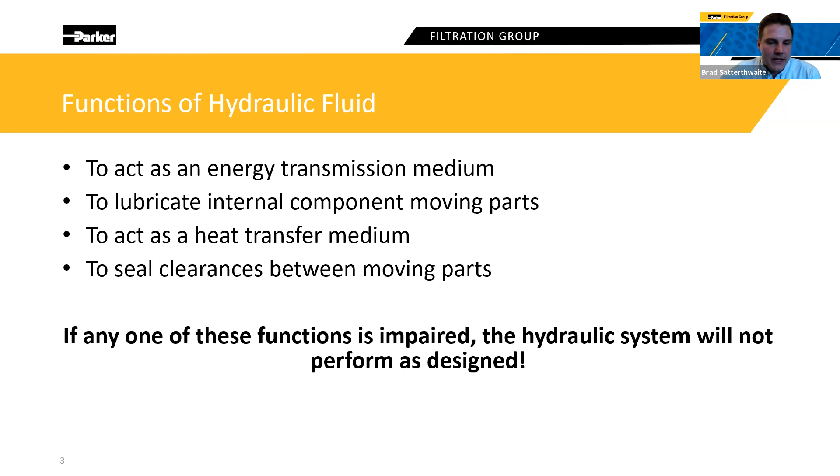If any one of these four functions is impaired, the hydraulic system will not perform as designed. From a leaking system to a system that does not have the output it was designed for, hydraulic contamination is the main way these problems start. It is the main cause of these impaired functions, and can be attributed to over 75% of the hydraulic and lubrication system failures we see in the field.

So that contamination will get into your system. It'll break down those four attributes of hydraulic fluid and can cause some headaches in the field.

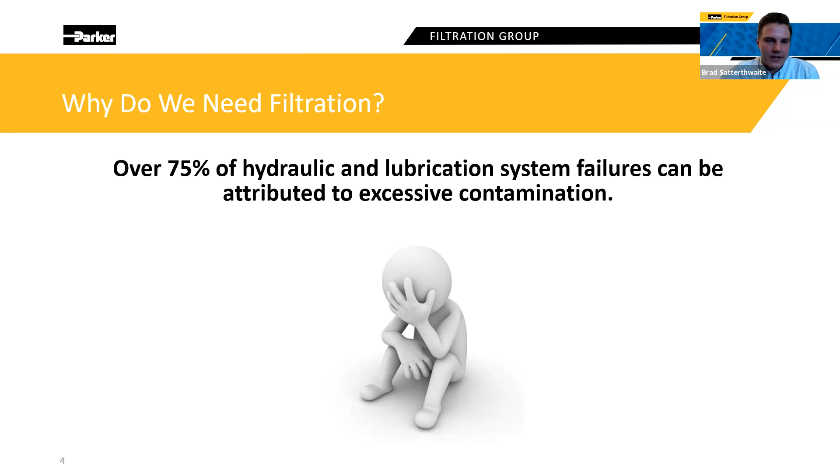When we talk about contamination, there are three main types found in a hydraulic system. The first one is probably the most common, the one everyone's most familiar with—particulate, just hard particles within the system. But there's also water and air contamination that can get into your system and interrupt the functions of that hydraulic fluid.

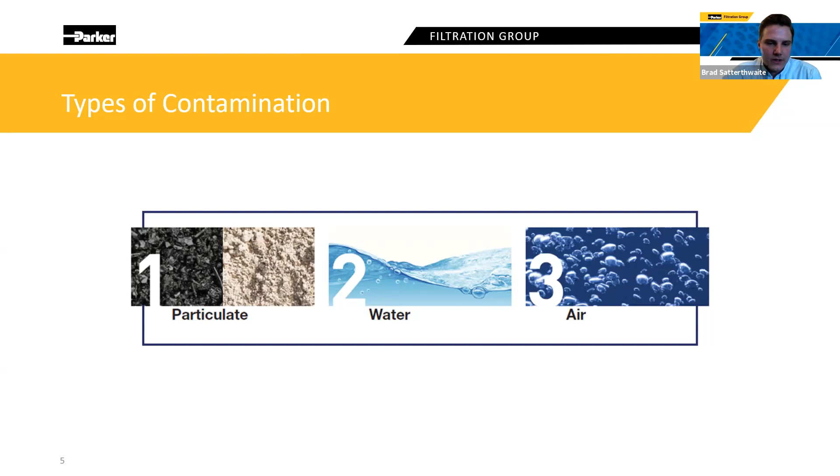To dive into particulate contamination, there are two different types: silt and chips. Silt is the small particles within the system, typically less than 5 microns in size. You need to care about those as they build up within the system over time. Those small particles won't cause big failures all at once, but if you let them build up and conglomerate together, they can cause issues.

The chips are particles greater than 5 microns in size. As soon as they enter your system, they have the potential to cause immediate catastrophic damage. They can get between clearances of different components and cause breakdown right away, so they're really the ones we need to filter out and keep out of our systems.

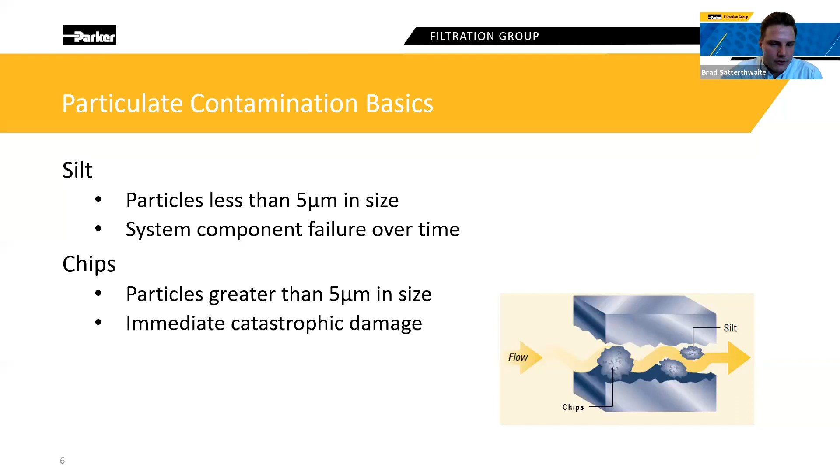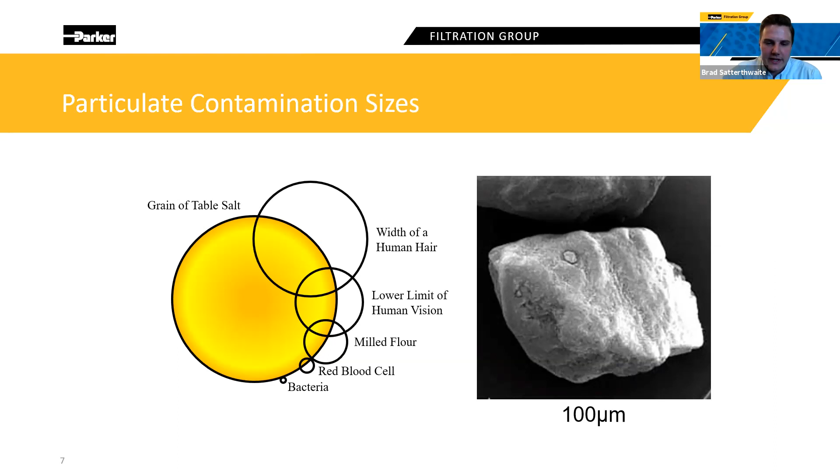When I said 5 microns in size, that's not really a unit of measurement most people are familiar with—it doesn't show up in daily life. So I wanted to give some real life comparisons for how small that actually is. A grain of table salt is about 100 microns across, so that's about 20 times bigger than the particles we care about.

The lower limit of human vision is about 40 microns, so anything smaller than that is not visible to the human eye—you'll have no clue it's in there. If you hold up a sample of oil, it'll look perfectly clear and clean, but there could be a ton of stuff smaller than 40 microns and greater than that 5 micron threshold that we care about.

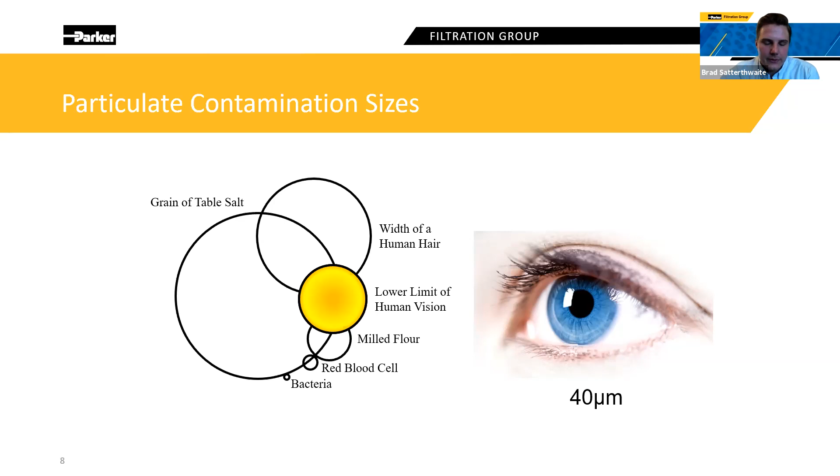When you get down to the size of bacteria and red blood cells, that's really the area we care about within a hydraulic system. That 5 microns is right in between those—it's not going to be visible to anyone, even the best vision among us. So that's really what you need to look out for. It won't be easy to diagnose when you take a sample, but it will still be present in the system.

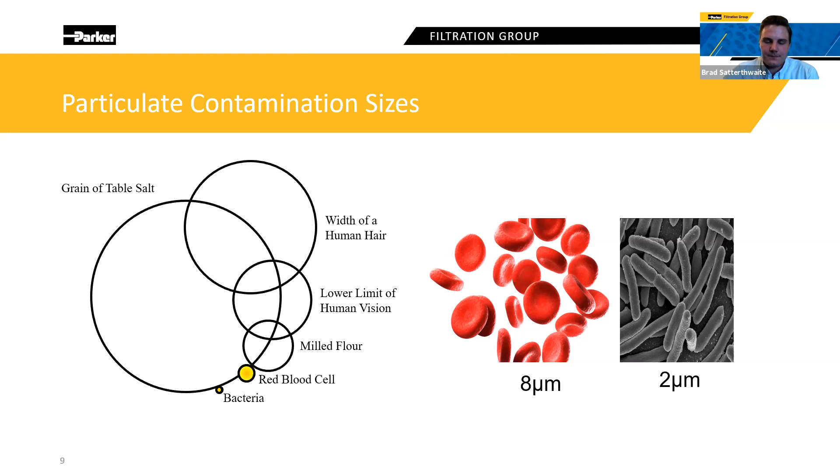When we talk about contamination, we first need to understand where it comes from. There are a couple main different types and sources of contamination. The first one being built-in contamination.

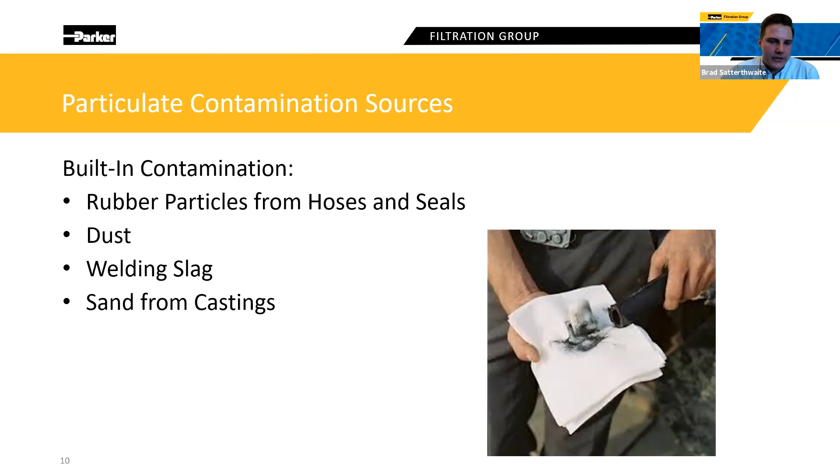Whenever you're building a hydraulic system, you'll be cutting hoses, and there'll be seals going in that can generate rubber particulate if left in the system. If the system was built and then sat around the shop before being put in service, it can gather dust or welding slag if that's present in the environment. Different parts can have sand from castings in them, depending on how they were manufactured—that's another place contamination can just be built into the system. It may not have done anything wrong; it is what it is, present when you build it, and it's part of the building process of a hydraulic system.

There's also externally generated contamination. Depending on the environment, there can be a wide range of ingression rates for your hydraulic system.

You may think the assembly facility you're in is perfectly clean. How could any particulate be in the air? But again, it's the really, really small particles that you can't see. You don't even know they're there, but they're going into that system at a high rate. If you're in a dirty environment, like mobile equipment or construction equipment, you could even be pulling in up to 10 billion particles per minute. So this really puts into perspective that you may think nothing is entering the system, but you can have some extreme rates of particulate being pulled in.

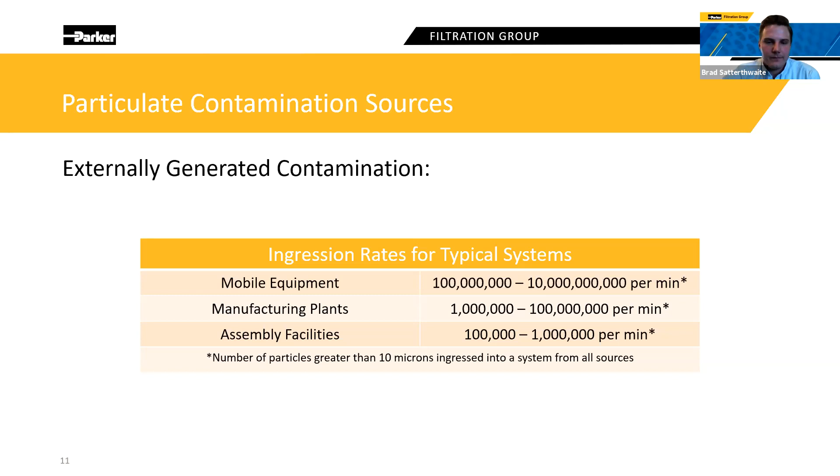Moving to generated contamination. Even if you're not pulling much in, doing everything right, you can still be generating contamination within your system. The main ones to look out for here: abrasive wear is when a hard particle bridges two moving surfaces, scraping away material on one or both sides, which generates more particulate. And in turn, that particulate can generate more and more particulate. It builds on itself as it goes.

Another source of generated contamination is erosive wear. Silt or fine particles, if in a high speed stream of fluid under high pressure, can run through your system and break down edges or surfaces within it. The best way to picture this is if you have a bend in your system, all those particles are flying through the fluid, and as soon as they hit that bend, they slam into the end of the pipe. When it does that, it breaks away little pieces every single time. Over time, it continues to build on itself and gets worse and worse until you have chip particulate that can cause major problems in a system.

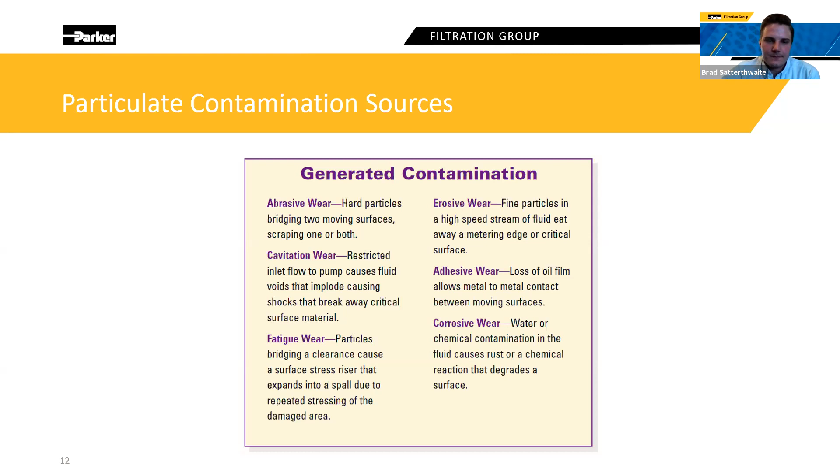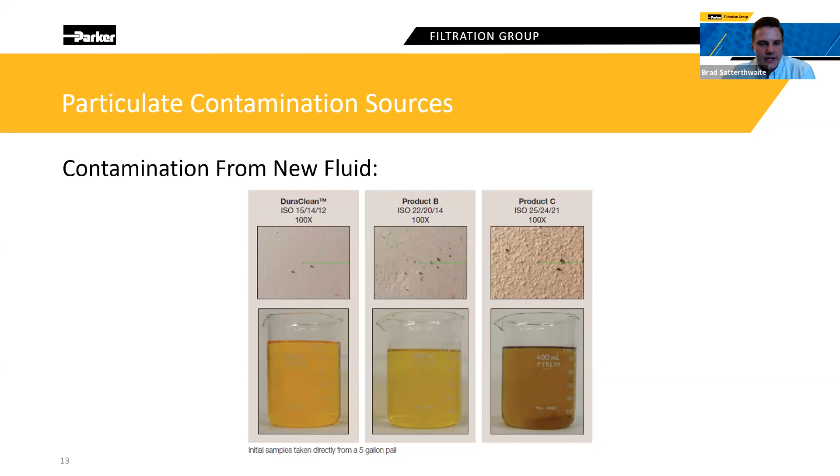Most manufacturers add different dyes and coloring to their oil to get it to look a certain way out of the pail. As you can tell, this really dirty one is the dirtiest oil, but you'd guess the next one would be second dirtiest, though it's actually a lot cleaner than some others. So just visually inspecting oil, both because of small particulate invisible to the human eye and by color, is not a good way to diagnose what's wrong with the system.

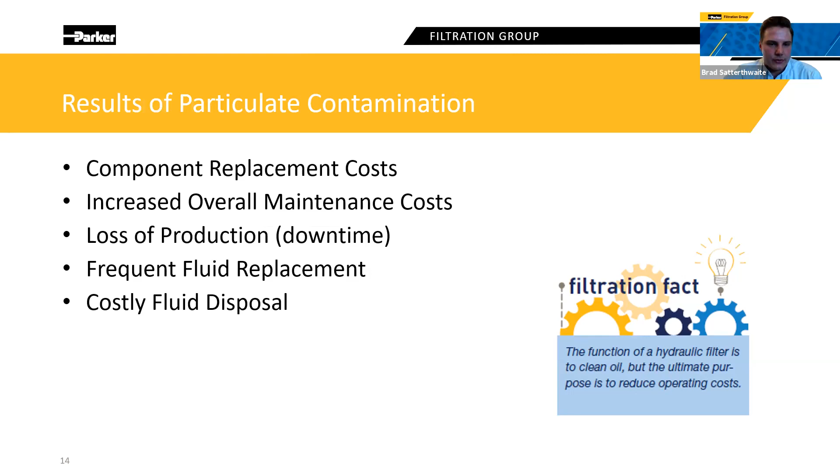Going into what actually happens when you have particulate contamination: it builds up over time, you get bigger and bigger particles in the system, and you can increase component replacement costs. That particulate can break down different components, causing increased maintenance to replace those parts and increased costs to buy new ones. All that together can increase loss of production or downtime for your system.

That obviously costs money as well. You're not able to produce or use that equipment while it's getting fixed. It really causes a bunch of headaches just because of these little tiny particles in the system that you can't even see.

On top of that, there's frequent fluid replacement, which can be very expensive, just to drain out all the oil and replace it with new clean fluid. But then you also have to dispose of the old fluid, and that can be 3 to 4 times as costly as buying the new fluid is.

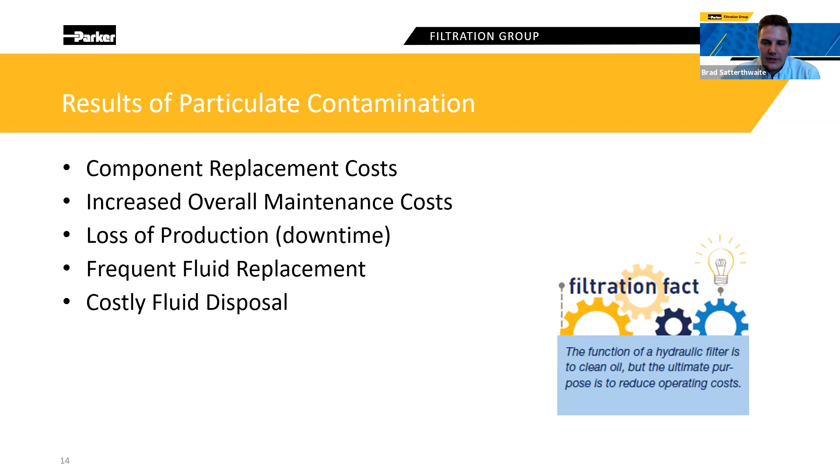The function of a hydraulic filter is to clean the oil, but really you need filters to reduce operating costs—reducing downtime, reducing maintenance to keep your system running. That's what a filter is used for. It does clean the oil, but really what you care about is keeping the system up and running at a healthy rate.

To prevent particulate contamination, there are a few things you can do. The first is utilizing reservoir air breathers. Instead of pulling dirty air straight into the system, you can use an air breather to filter out that air and capture as much particulate as possible before it enters your system.

You can flush systems before initial startup so that built-in contamination can be minimized. You can flush it all out, hopefully getting it as clean as possible before you actually start up and get up to pressure.

You can specify rod wipers and replace worn actuator seals. Those are essentially just seals to keep the outside environment out of the system, rather than pulling in any dirt that may have generated or accumulated on exposed pieces of the system.

You can also cap off hoses and manifolds. Anytime you take a hose off the system and have an opening exposed to the environment, capping it off as soon as possible can decrease the amount of particulate that enters the system.

And like I said, you can pre-filter all new fluids. You don't want to get a new gallon of oil and just dump it straight in—you're introducing a whole bunch of dirt when you buy that new oil.

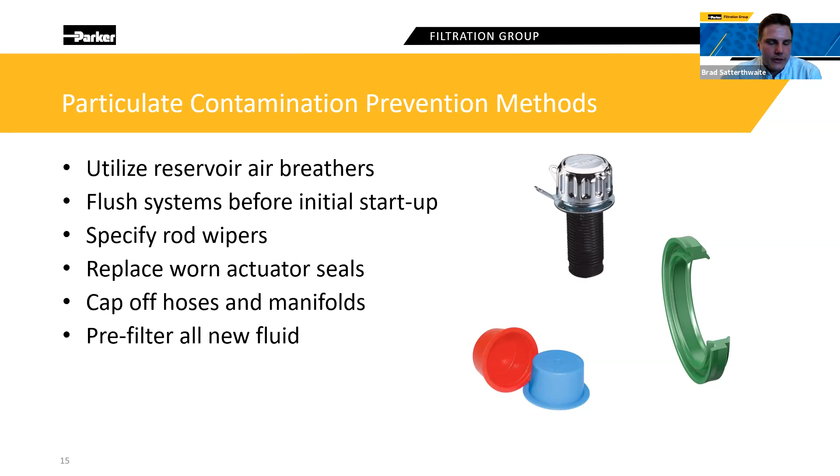Some warning signals: how do you actually know that particulate contamination might be a problem? How do you know this is something you need to worry about?

A couple of the main common warning signs are valve spool decentering—you may have leakage or chattering in that valve spool. You may also have pump failure, lose some flow, or just be replacing the pump more frequently than you should, since over time particulate eats away at the pump, causing it to fail prematurely.

You can also have increased servo hysteresis. These are just some main warning signals to look out for—if your system has any or all of these, particulate contamination is a great place to start looking.

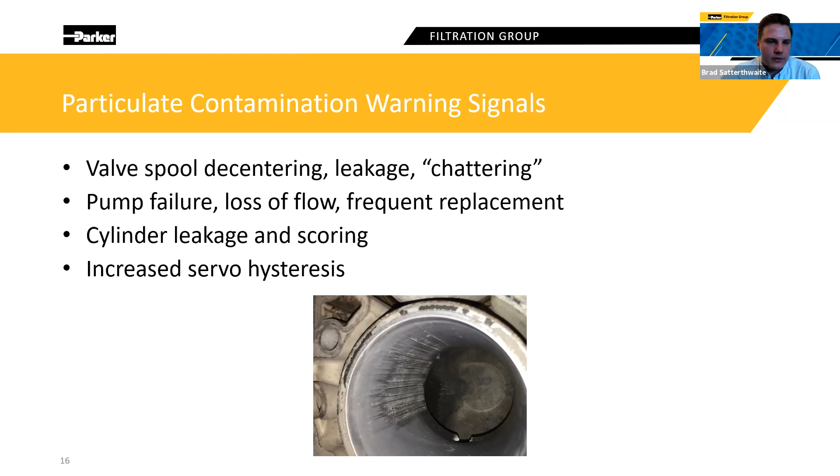If we connect it back to the fact that 75% of hydraulic system failures can be linked to contamination, a lot of these don't look like contamination right off the bat. You may think something's wrong with the pump or the valve spool, but all of it can be traced back to contamination rather than the actual component itself.

So what you need to look for now, how do you actually know how bad the particulate contamination is? How do you know you have it?

Different equipment has recommended fluid cleanliness standards, so you need to verify that your filtration currently on the system is performing as it needs to. You also should know what you're putting into the system. If you test that new oil and know it's clean when putting it in, you know you're not dumping a bunch of dirt into the system. It even goes back to the new equipment - today's standards a lot of times have fluid cleanliness levels connected to the warranty of that equipment. So if you're using fluid that is dirtier than the manufacturer recommends, that could void warranty and cause that equipment to break down a lot quicker than expected.

So how do you actually do this? On the market, there's a variety of particle detector products. It'll basically shine a laser onto the fluid and tell you how dirty it is using the shadows of the particulates. You can also have lab testing - it'll tell you exactly what is in the fluid, from the type of metal to the water content, to really the size of the particles. Anything you may need can be accomplished by that lab testing.

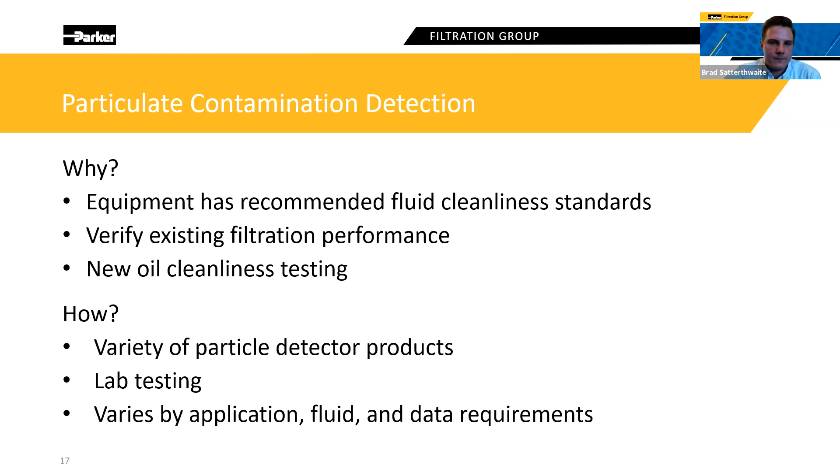So once you know you have excessive particulate contamination - you've done the particle detector, you know your ISO code, your fluid cleanliness - and you realize you need to make it cleaner, the best way to start really is to look at the current filtration and see what you have there. You can have different types of filtration loops - an offline filtration loop, or even inline. You can have a suction, a pressure, or a return filter. All of these have different pros and cons depending on the system, but you really want to make sure it's sized to fit the system and sized to get you down to the cleanliness code that you need.

You can do that by adding different offline loops to keep polishing that fluid as needed. You can adjust your filter media construction - going from a paper media or cellulose up to a fiber media can improve your filtration and filtration efficiency. You can also adjust your filter media grade, so rather than attempting to filter out the 20 micron sizes, you can bump it down to 5 micron or even 2 micron, depending on the filter you need.

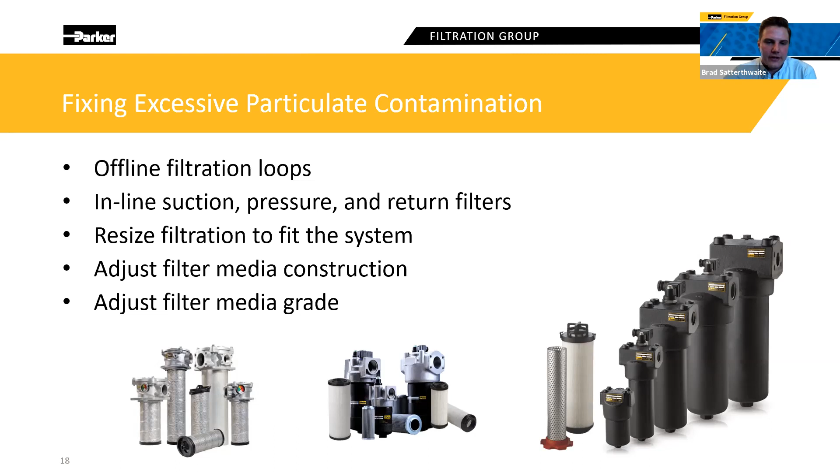So before I jump into water contamination, I know we have the chat, or you can raise your hand, but I just want to make sure there's no questions before we move on from particulate. It's really the most common - I just want to make sure we're all on the same page and there's no pressing issues before we continue.

The chat looks pretty clear right now, Brad. Okay, perfect. Yep, looks good.

So we'll go ahead and dive into the water contamination here. Back to the basics again, just like we started with particulate contamination - there's two types of water contamination in hydraulic systems: dissolved water and free water. Dissolved water is when the water content is below the saturation point of the oil and you can't visually see the mixture. Think of it like adding salt to water - before you reach that saturation point, the salt just dissolves into the water. You won't be able to see it's there, but it is still present. It's a very similar comparison to water dissolved in oil - it's still present.

It can still cause issues for certain applications, but it's not visually detectable in your solution. Free water, on the other hand, is above that saturation point. As you can see down here on the bottom right, it turns into this nice cloudy mixture when it's all combined, but it does generally separate into a separate layer.

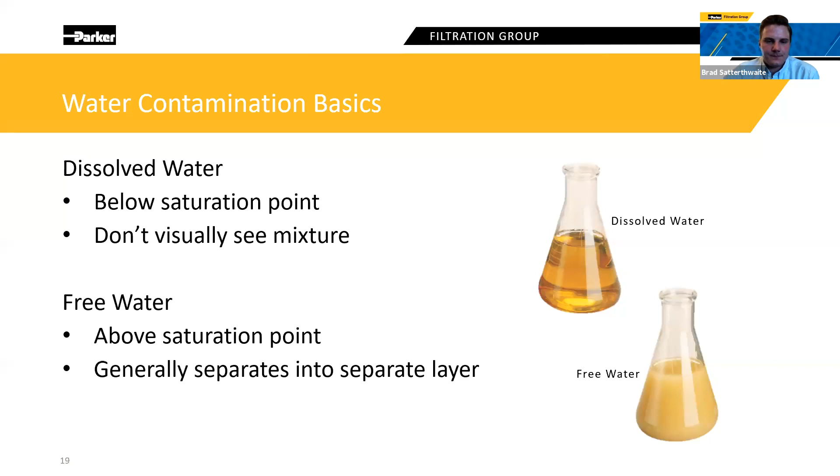So where does it come from? It can be similar to the particulate contamination. It can come from those worn actuator seals, and it can also come from reservoir openings. So if you see this picture on the right, if this isn't sealed off and only having the opening come through this breather, water can drip down into the system by just accumulating on top of the reservoir.

It can also come from condensation. If you have temperature changes in your environment, that air that enters the system can heat up and cool down, and that water will condense on the reservoir surfaces, and that can fall down into your oil and be introduced into the system that way.

Another common one we see is heat exchanger leakage. If your system has a water heat exchanger to cool down your oil as it runs through the system, a leak may start there, and that water will enter into the oil stream and can build up until it gets to that free water tipping point.

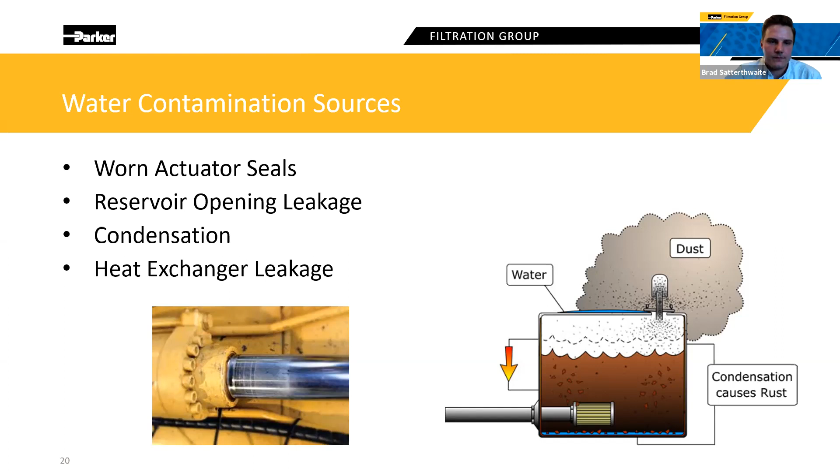Again, what can this water contamination do to the system? The water can enter in your system and cause corrosion of metal surfaces. It can accelerate that abrasive wear, which comes from the decreased lubricity you see in the oil. So that water is not going to be as slippery. It's not going to lubricate the internal moving parts as well as the oil will. So those metal parts may rub together and break off into more particulate contamination.

Bearings in the system can also be broken down in a similar way, just by not being as lubricated as they need to be. Different fluid additives can break down. All oils pretty much have an additive package within them, and this water can enter in there and break down some of those properties. Again, the viscosity can change, so that can affect the performance.

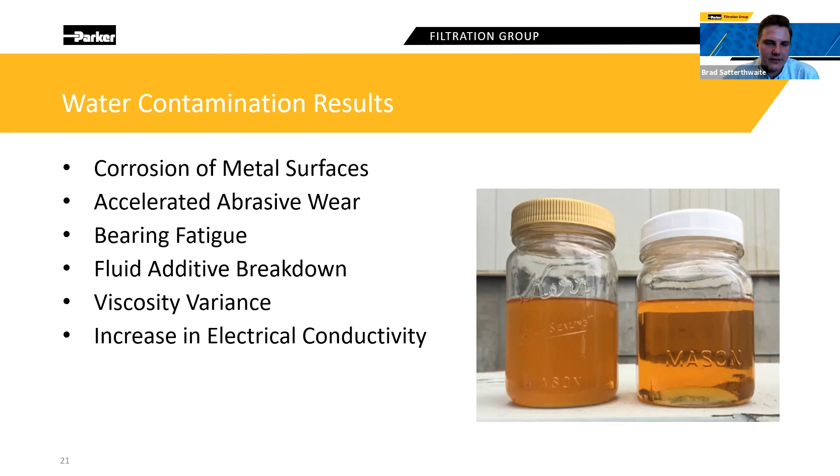It can affect the pressure drop you see within a system, and it can also increase your electrical conductivity. That's something that's a little bit more specialized for different applications, but if you do see that electrical conductivity rising, it's usually attributed to water.

One thing I wanted to dive into here, so I've kind of touched on it a few times, but mechanical equipment and water don't mix very well. So if you start here with 5,000 ppm in your system and you get rid of some of that water, you decrease that parts per million down closer to the saturation point. So this 450 that you drop it down to is still above the saturation point of most oils.

So you'll still have free water present, but you have decreased it by a lot. If you look past that, that would give you a 4 times increase in your mechanical equipment life. So just by dropping it down, you still even have free water. You could even go further and further the cleaner you go, but the mechanical equipment will last 4 times longer just by decreasing that water parts per million from 5,000 to 450.

So that's just something to kind of bring it back to real life. What does this water contamination actually do? It really just breaks down your equipment way faster than it should be. It can cause, again, a lot of costly replacements and maintenance attention.

So how do you prevent this water contamination from entering? It's a lot more cost effective to keep the water out of a system rather than try to get it out once it's already present.

You start by using similar prevention methods as with particulate contamination. Rather than just traditional air breathers, you can use desiccant air breathers. These will filter out the particulate from that air as well as water that comes with it. There's always water present in the air in our environment, and this desiccant will absorb that water before it enters your system, introducing clean, dry air to that reservoir.

Again, you can also flush all your systems before initial startup. Before you introduce your oil, there could be buildup or condensation within there that you want to get rid of before you bring it up to pressure.

You should also specify rod wipers and actuator seals. Just like particulate, water can build up on those exposed surfaces, and you don't want to bring that back into the system. You can also cap off hoses and manifolds whenever you're handling or doing maintenance on them. Just like with particulate, that water is in the environment, and you can't keep it out if there's no cap on those hoses or manifolds.

Now going into some detection methods of water contamination. It's a little bit different than particulate contamination because it's not a hard particle, so you can't see a shadow from the water. The first thing you can do is a visual inspection.

If you take a sample of your oil and it has a cloudy mixture, that cloudy look to it is a dead giveaway that you have water contamination in your system. Also, if you take a sample and you're not really sure if there's water contamination or not, let it sit, and it'll separate out into different layers if water is present.

You can again use lab testing. Like I mentioned before, lab testing can tell you anything and everything you could possibly want to know about your oil sample. There's also relative humidity and water content sensors.

If you want the fluid to stay in the system, you need constant uptime water content readings. You can utilize those sensors so you don't have to take samples or turn the machine off to get any separation of that fluid. Again, it does vary by application, fluid, and data requirements, so it's kind of a case-by-case basis what's going to be best for you.

So to fix excessive water contamination, once we've looked at it and know there is water present in the system, you need to do something about it.

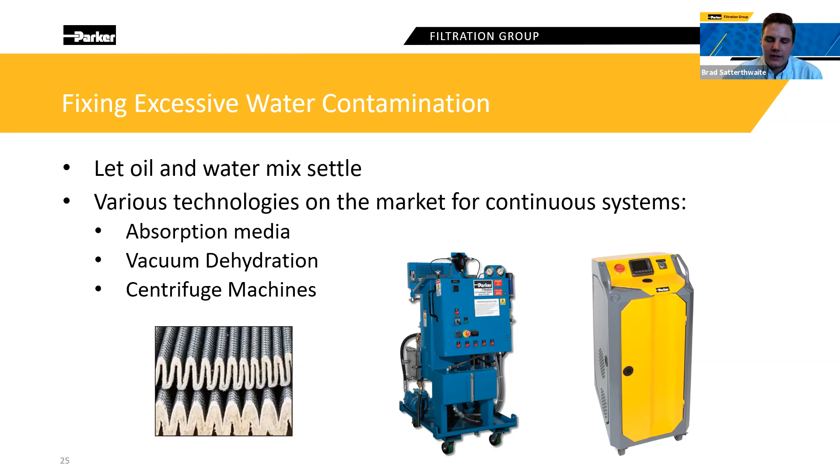So from what I could tell, the chat is still pretty clear. I'm not sure, I don't think anyone's raised their hand. I haven't seen that with a question. No, I haven't seen that either, Brad.

All right, sounds like everyone's on the same page here, and we'll jump right into air contamination next. Similar to water and particulate, there's different types of air contamination. There's a little bit more going on with the air in terms of how we classify it.

Similar to water, there's free air and dissolved air. Free air is basically just a pocket of air trapped in the system, where you'd expect there to be oil, there's just an air bubble or air pocket within one of your pipes or components.

There's also dissolved air, which is the exact same thing as dissolved water. It's just within the fluid. You can't tell it's there visually, but it is present.

There's entrained air, which is just a ton of small bubbles dispersed in the fluid. You can see in this picture these bubbles on the right, those would be entrained air. They're just in solution, little bubble pockets that travel around with the fluid.

And then there's also foam, which is larger air bubbles that build up on the surface of the fluid. These will typically stay in the reservoir unless you pull the fluid level down too far, but they are present in the reservoir, and it's easy to see those when you open it up.

As far as where air contamination comes from, it can come from system leaks, just like water and particulate. It can come from pump aeration, so if your pump isn't seeing all the fluid it needs to, or isn't designed correctly, it can introduce air contamination that way.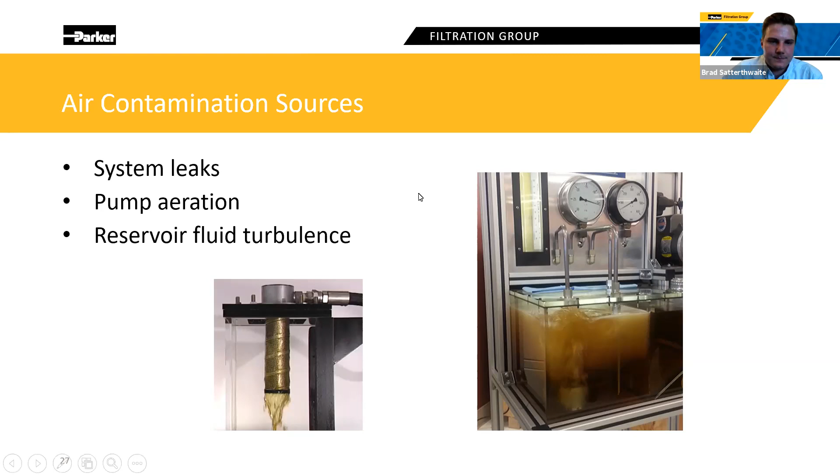As far as what air contamination can cause within your hydraulic system, the main one you can see is a loss of transmitted power. Rather than using that power to cause movement, the pressure will build up and compress these air bubbles individually before it's actually able to move anything.

That causes a spongy feel typically to a hydraulic system, where you press forward on what you want to move and it has to wait a little bit of time. There's a lag as it's compressing all these air bubbles before it builds up the pressure to actually move the system.

You can see a reduced pump output. Again, you can see a loss of lubrication, especially when the air is entrained in the system and dispersed throughout the fluid. It can decrease that oil viscosity and oil lubrication properties.

It can increase your operating temperature. Similar to how those bubbles need to be compressed before the pressure builds up in your system, that compression greatly increases the temperature of that air bubble, and that will leak out into the rest of the system and spike your fluid temperature.

This can transfer into the different components and cause less than ideal operating conditions. The reservoir fluid can foam, and it can even get so bad that it may overflow from your reservoir and cause a mess everywhere, as well as that foaming being pulled down into your system if it gets too bad.

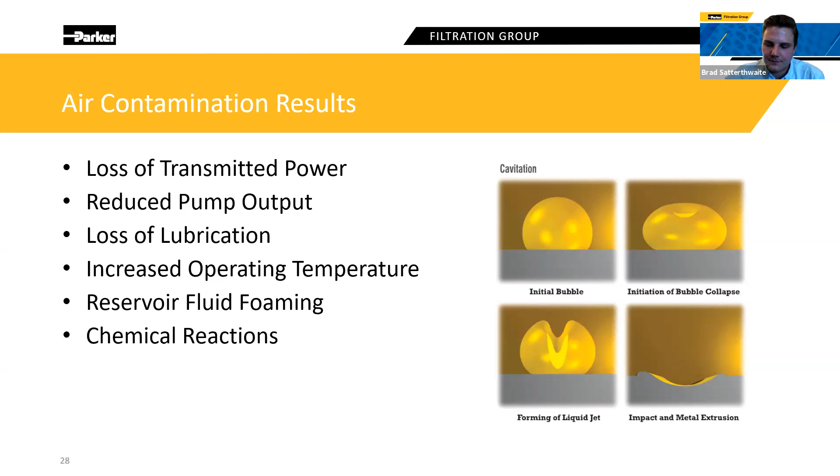To prevent air contamination, it's a little different than water and particulate, but really what you need to do is air bleed your system. A lot of systems are designed with these in there. It can help get out that free air, those air pockets that may be present.

You can also use a flooded suction pump so that it's not pulling in any air, so it won't introduce that aeration into your system. If you design the reservoir correctly and have a filter or diffuser, or your return line entering in correctly without splashing around the reservoir, it'll decrease the amount of air contamination.

That diffuser, as you can see down here, rather than having all the fluid mixing around all over the place, if you just have nice little laminar flow lines, it'll decrease that air contamination. As you can see laid out here, with laminar flow there's not much room for air to be splashing around and introduced into the system.

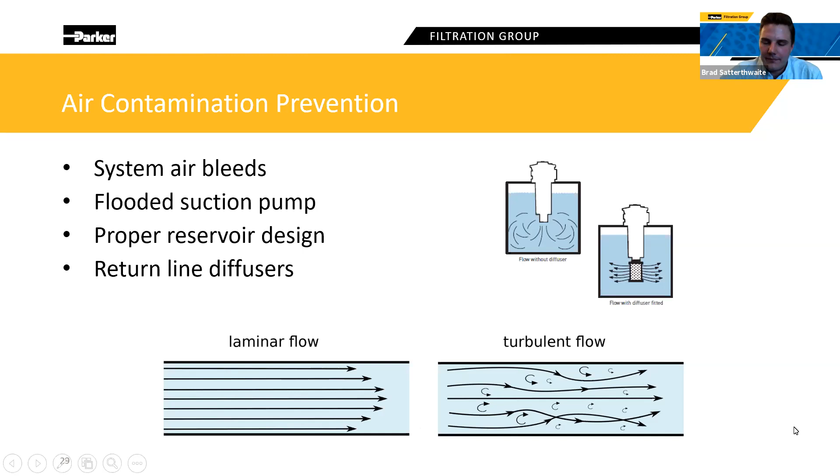When you get this turbulent flow, there'll be splashing and air pulled down into the water or oil, and that can cause entrained air and air bubbles within your system.

To detect air contamination, the main way to do it is visually. There's not a ton of products on the market that can test for air contamination just because it's easy to see visually, and that's the most cost-effective way to do it. So whether you look at a reservoir or a sample, you can see bubbles within the fluid, or on top of the fluid.

One thing I want to point out in this picture on the right: depending on what type of sight glass or level reader you have on your reservoir, you can see different things. If you have the bullseye just up at the top to tell you the level, that'll show the foaming coming in, so you can see the air contamination at the top. Or if you have a column type, you'll really only see where that fluid enters into the column. So just something to keep an eye out for. Remember, whichever one you have, it may not represent the entire reservoir, but it is just a little snapshot into there, and it can be helpful depending on what you're looking for.

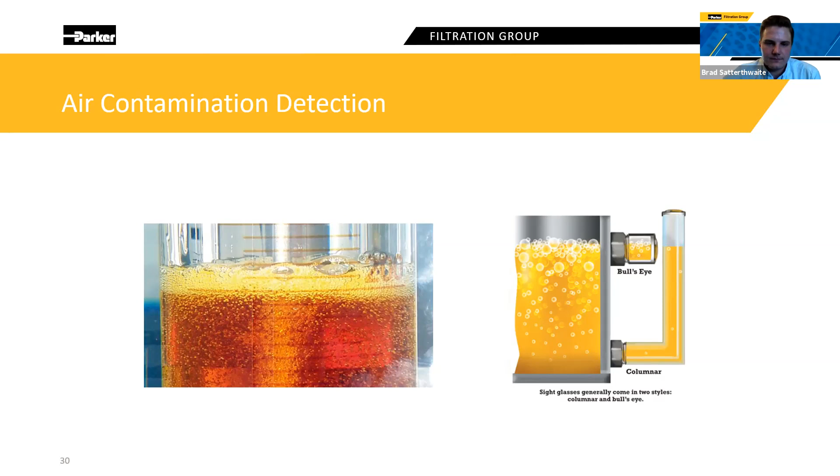In order to fix air contamination, the best and cheapest way is just to let the system settle. If you can shut down and let it turn off, those bubbles will rise, and eventually the free air will separate from the system. You may have to redesign some system problems or incorrect designs within the system. So if your reservoir is designed so the fluid is splashing all over the place, dumped in rather than entering at the bottom or within the fluid level, that can introduce aeration.

So that is all of the information I have here today. So far there haven't really been any questions or comments, but I want to give time now to dig into that, see if anything has come up since with air contamination, or if you've thought about anything with water, particulate, or really anything else within the hydraulic system. I'd love to help answer some questions.

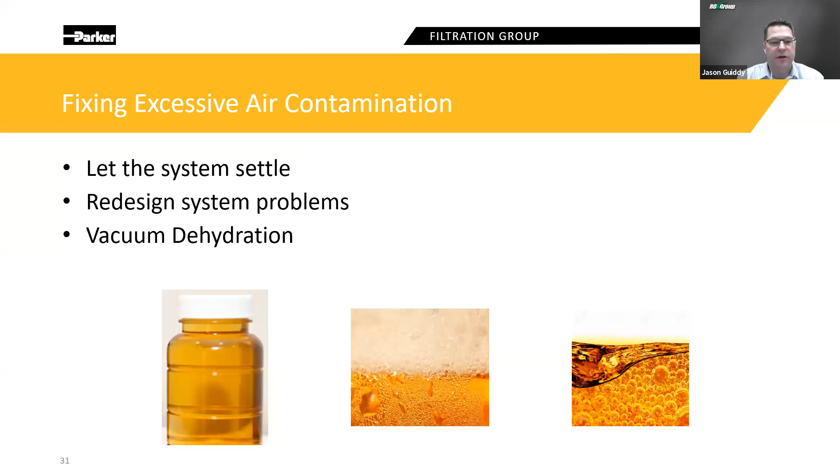Yeah, thanks Brad, appreciate it. So yeah, let's open it up to the group here. Maybe there's a question you had on your mind coming in that wasn't addressed in the presentation. Oh wait, we just got one come in.

It says heat, I was just wondering about heat. Okay, yeah, so I think the main point is you'll see heat introduced into the system when we're talking about contamination. It can come from air contamination being compressed down - that's one source where heat can be generated within the system. It can also come from friction within the system, so if you have water or particulate within your system, that can introduce extra friction and break down the lubricity of the oil, causing it to generate heat as you have moving parts. So the starting point would be to look at the system and see what contamination is present. Sometimes the power and design of the system will introduce heat naturally, in which case you may have to use coolers or something like that. But if it's a new problem that wasn't there when the system was new, contamination can probably be to blame. So looking at those factors will be your best guess on how to fix that problem.

Okay, he added a little bit to that. It says we have overheating issues sometimes. I'm thinking it's from shear in the valves and pumps, and also we're using food grade oil.